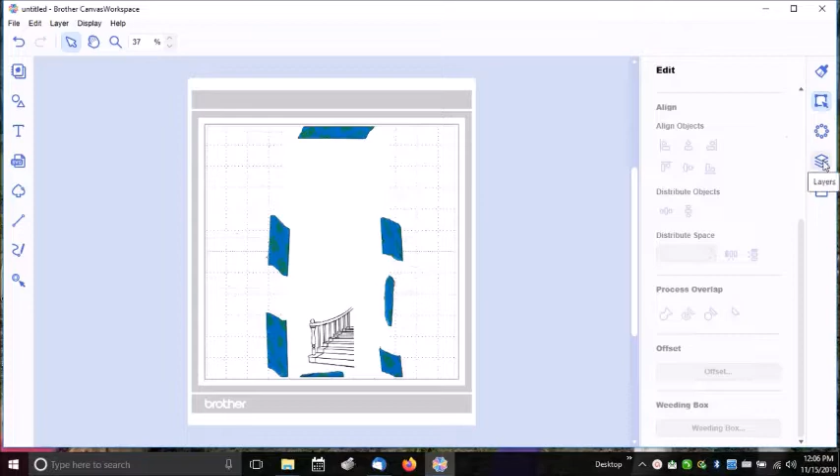I'm going to come over here to my layers view, and every shape it found except for the image, I'm going to select all those and hit my delete key and delete them. So all I've got here is my scanned image from my ScanNCut. So I'm going to zoom in around it.

And now I'm going to manually draw the outline, so I am going to use my path tool. On this path tool, I am just going to draw kind of roughly following the outside outline. Now, if you click too close together, you're going to accidentally close or end your cut line. So you want to make sure as you're clicking your mouse button that the next point is far enough away from the last one that it doesn't think you're trying to close your cut line.

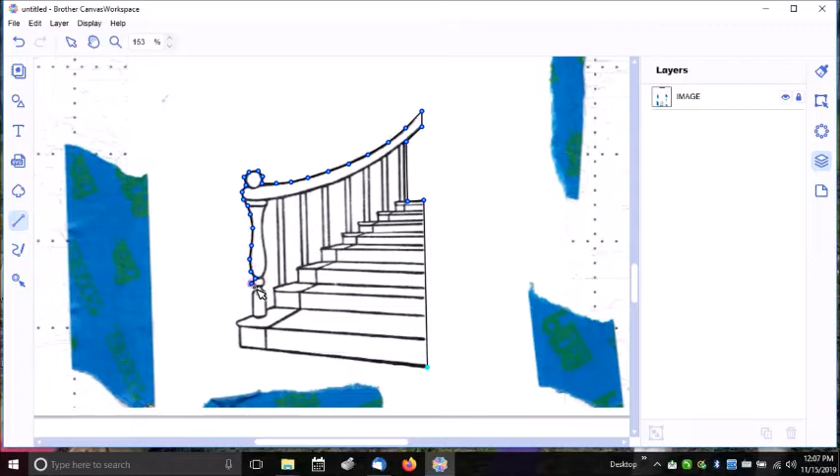And so I'm just coming around here and just clicking my left mouse button to make an outline. Whoops. As you see here, I accidentally closed it. So I'm going to zoom in at this area where I accidentally closed it.

And I'm going to come up here to my select tool. For the rest of it, I'm just going to click on that last point, and I'm going to add a point. So you click on the last point and add a point, and it adds a point between that last point and the previous point. So this is the new point right here. And so I'm going to click the last point and then reposition the original.

If I want to add another point to help refine this curve, then I can do that. Just before you add a point, make sure that whatever point you're wanting to add a point behind, that is the one that's selected. So I'll add another point, click and drag that last one to where I want it to be, add another point, click and drag, click that last one, add a point, drag the last one to the next position, and then I'll just continue this until I have completed my outline.

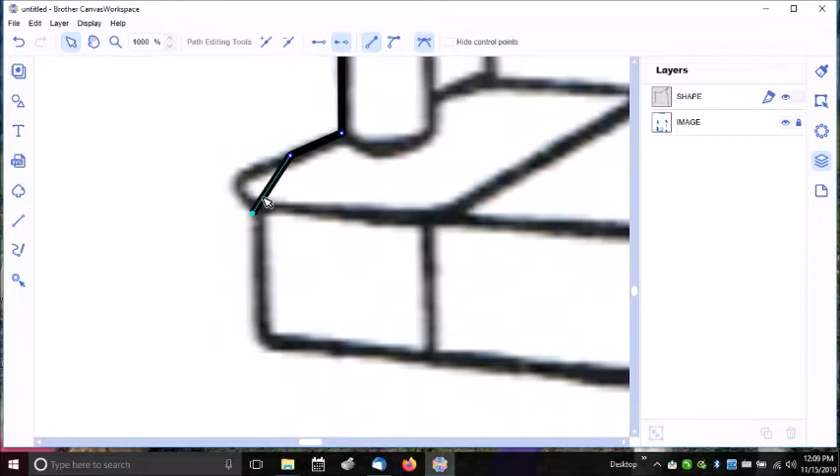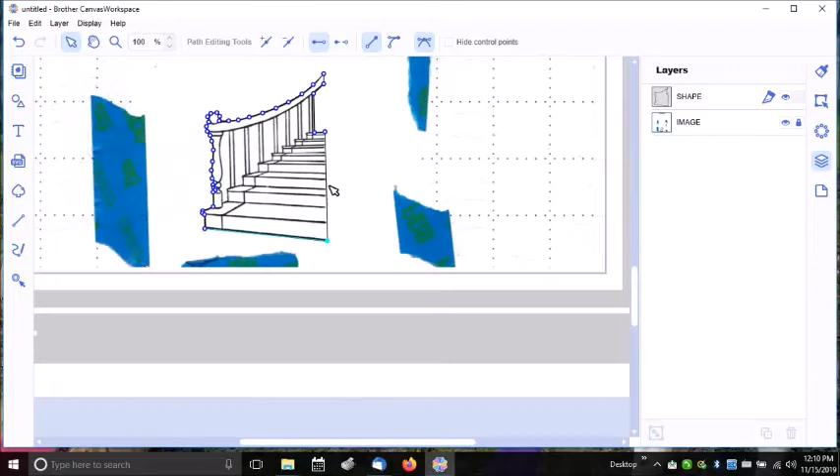Okay, now, even though it looks like it's made one cut, you'll notice here that these two lines have not actually connected to each other. So in order to connect those two lines together, we need to select our cut lines and then select Close Outline. Then you'll see it actually close the outline. So now this is just one continual outline. And if we were to untoggle the image, you can see this is the outline.

Now, if we want to refine it, let's go ahead and zoom in around this ball. I don't like how that's drawn. So I'm going to click on it until I get into Edit View, and then I can move these pieces. If I want to add some points, I can to help refine that, and add a point here to help refine that. This way I can make sure that this outline is drawn exactly the way I'd like it to be, just by adding points and dragging to make it a little bit better.

And so now you can see, if I toggle off the image, this is what the outline of the staircase looks like. Now I'll do the same thing with these banisters, and let me zoom in.

In between the banisters, I'm going to go back to my path tool, and I am going to just click my left mouse button to draw around, trying to be careful that I don't accidentally close my path, or end my path, I should say.

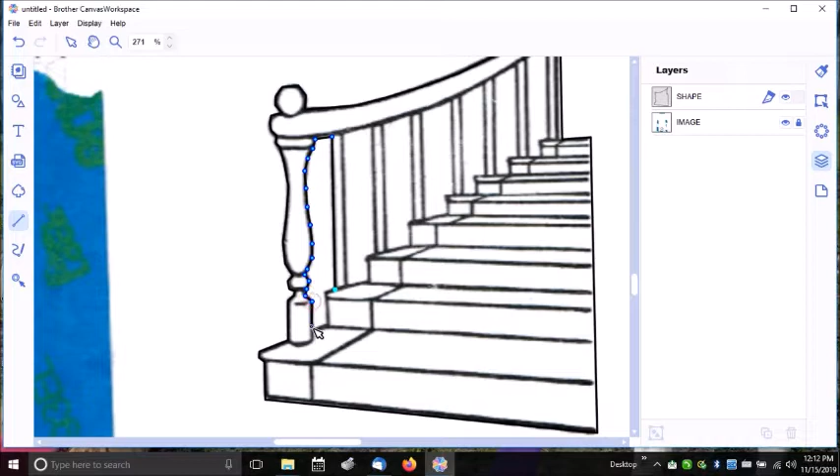So that I can complete this without having to manually add like I did before. And so now you see that one I was able to do without accidentally closing my path.

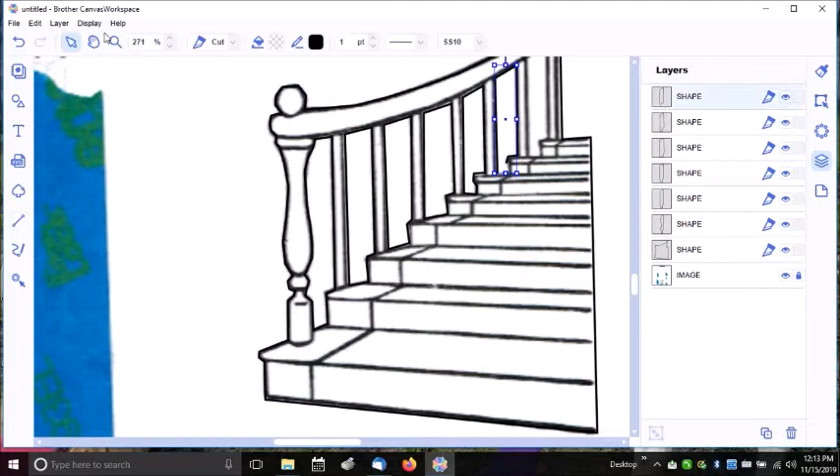That one I accidentally ended. So let's zoom in on it and click on that last point, and I'll add a point. Click it down, I'll add the point. And then, very important, you need to close the outline.

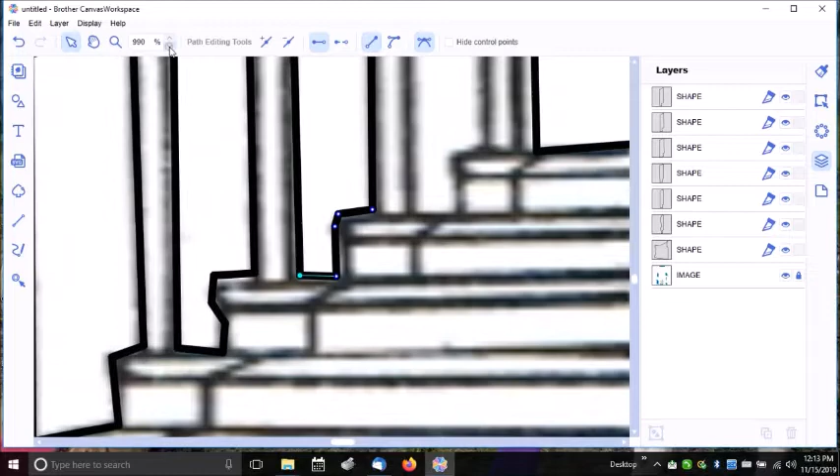And then we'll have one more to do here. Now, any place that I want to refine, all I need to do is click until I get into point edit mode. And any of these points that I'm not satisfied with, I can move them or add points.

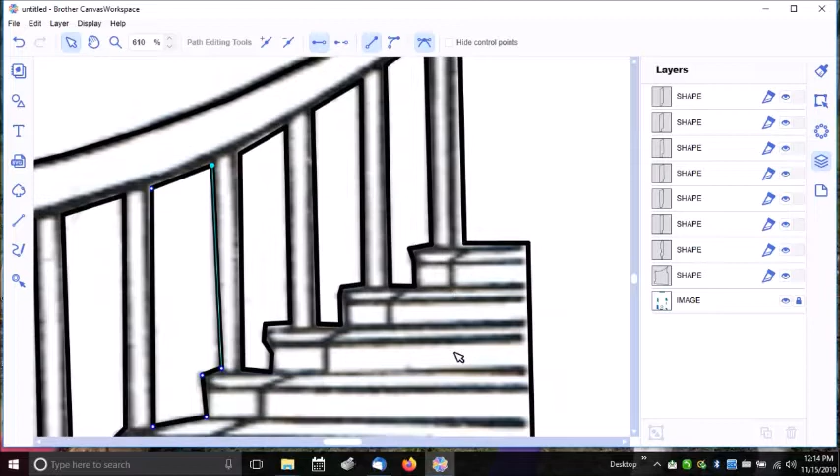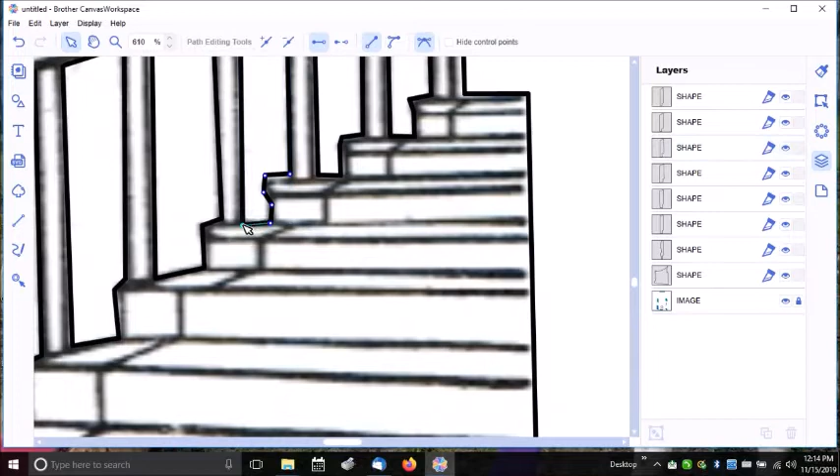Like, say I'm not satisfied with this, or I'm not satisfied with this. This way, just refine them all until I get them positioned the way I want.

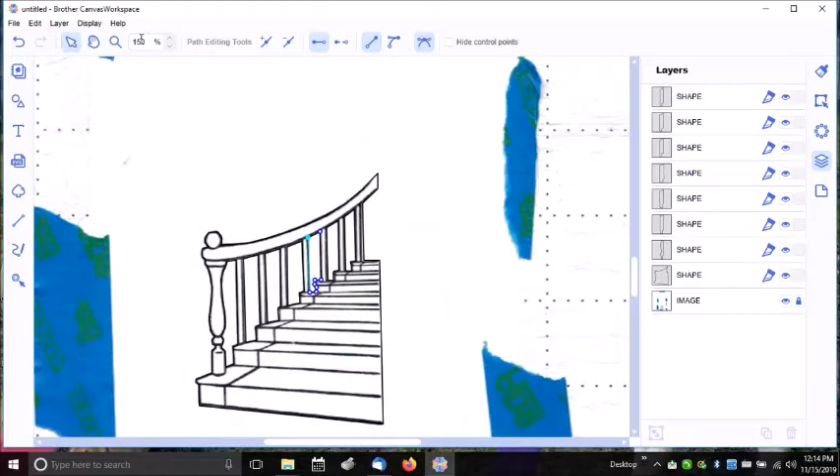And let's zoom out. And so now, if we toggle off the image, here you see we have our die cut with the openings for the banister.

Now, if you just wanted to cut out your stamped image now without an outline around it, you could send this back to your ScanNCut and cut.

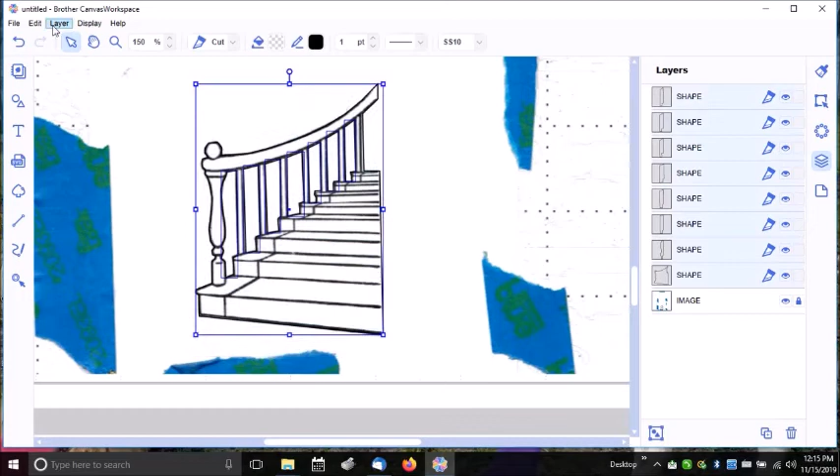You would do that by selecting everything, come up to Layer and Group, and then you would go File, Transfer FCM File via the Internet, and then you'd go to your ScanNCut, provided you haven't unloaded your mat, and you could cut out your stamped image at this point. Now, if we want to have an outline around it like a die cut would do, we'll ungroup it first.

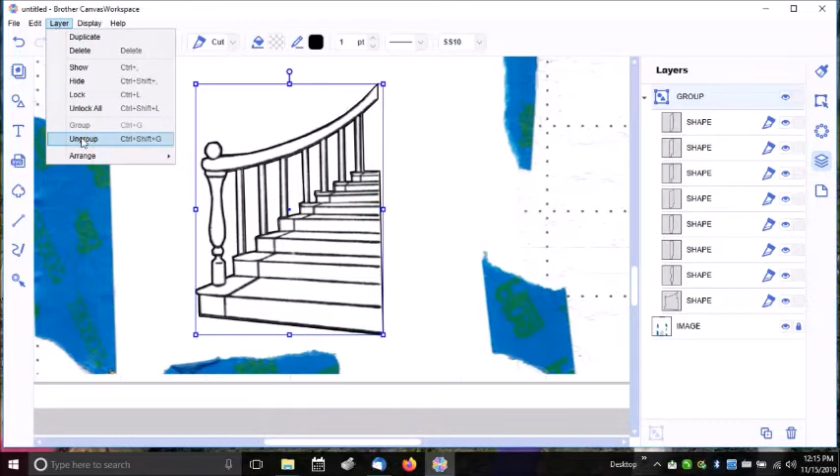We'll ungroup it first, and we'll work with our outside outline first, which is just this part.

And so we'll come to Edit. We'll come down here to Offset, and let's set it to 0.04, and we want it to go outward. We want to delete the original line and then click OK.

And so now you can see our outline is out by 0.04. If you wanted to have a little bit more of white space, you could have done 0.08.

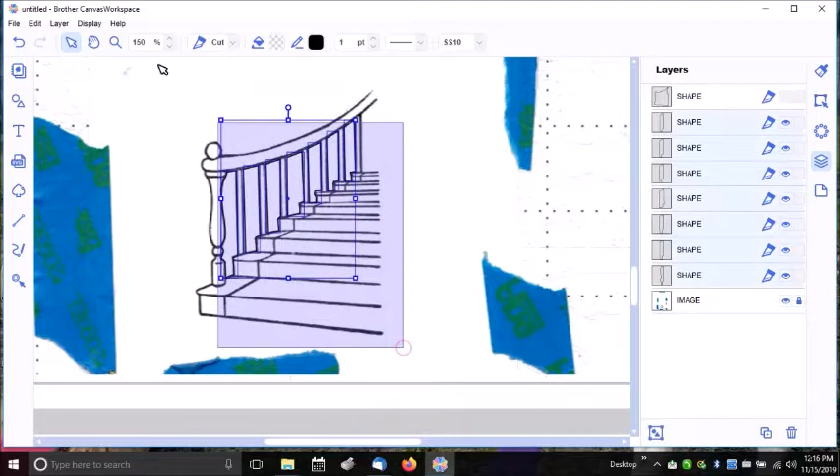Now for our inner ones, we'll just select all of those. These are in between the banisters. And we'll select them all, come up to Edit, Offset.

This time we want to go inward, deleting the original line, and we'll click OK. And so now you see here that we have our outline.

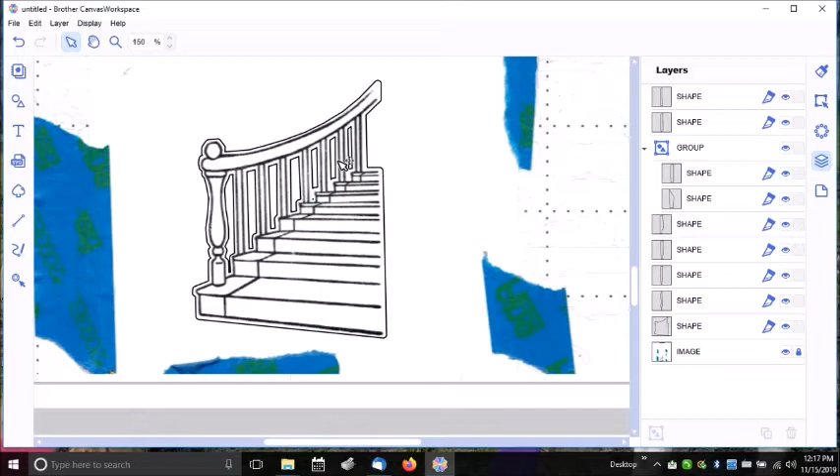Let's select our outside shape too. And so you can see your stamped image. One thing we probably would want to do, because looking at some of these, the way this is really close together, that probably would not die cut very well.

And so we have a couple of options. First of all, let's ungroup everything. And we will go into edit mode for this particular one here.

And let's maybe spread this out a little bit. And let's delete some of these lines so that we don't have quite so many. And then separate these out.

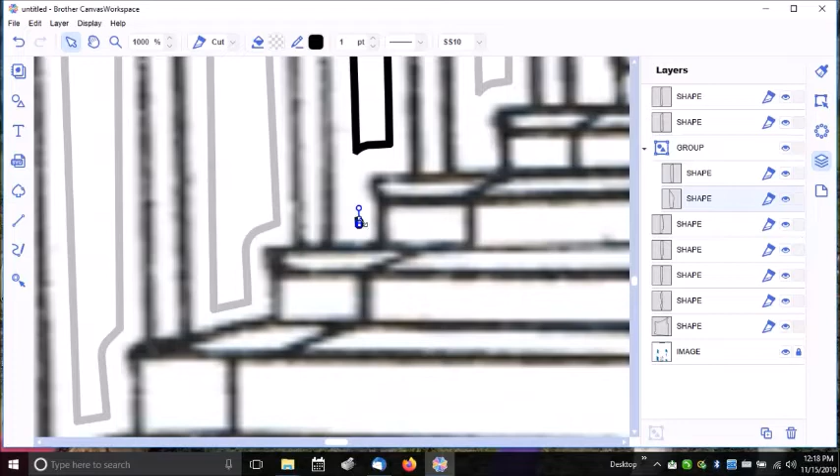And then up here, this small thing right here is not going to cut very well. So I will select it and just hit my delete key to get rid of it. And so everything else looks like it's okay. So I'm going to set my zoom back to 100.

I'm going to select everything, layer and group. And now we can go to File, Transfer via the internet.

Now we can go to the ScanNCut and cut out our stamped image with an outline. Okay, now we're back to the ScanNCut. So I am going to click this icon right there to load it from Canvas. And there we have it. Click OK. I'm going to select Cut.

Make sure that my half cut is off, that my pressure is set to auto, and then I will just press Start. Okay, and now I will unload my mat. And we'll see how it turned out.

And there is our final cut piece. Next, I'll show you how to cut out first and then stamp.

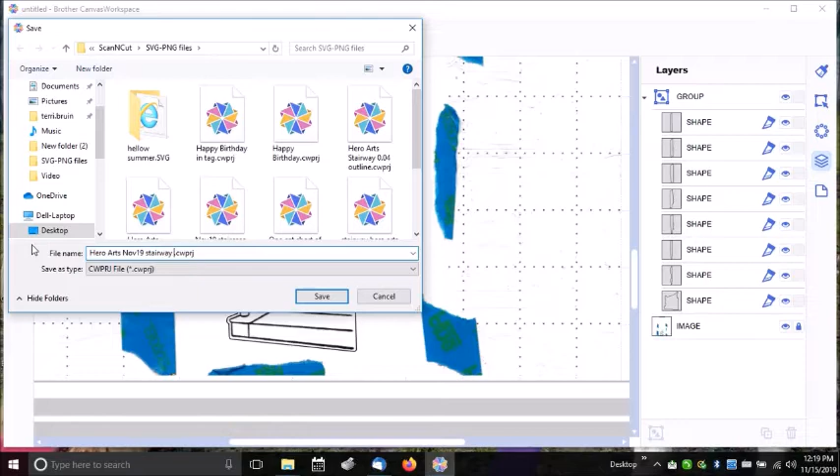And we could call this Hero Arts, November 19, Stairway, 0.04 outline.

So the next time you want to cut it out, you would actually cut out the die cut first. So we would open this file that we just saved, and then you would just transfer this file via the internet, and you put a blank piece of cardstock onto your ScanNCut and cut it out. And so I'll show you how to do all that.

Okay, now I've got some cardstock taped to my ScanNCut cutting mat. I'm going to go ahead and load. Okay, now I'm going to actually go home now, and I'm going to retrieve data. And let's zoom this in so you can see. So from the home, I'm going to retrieve data and retrieve from the internet.

And I'm also going to scan in the background. Okay, next I will place my cut file somewhere on the paper and click OK, and I want to cut. Again, make sure that the half cut is off and my pressure is set to auto, and then start.